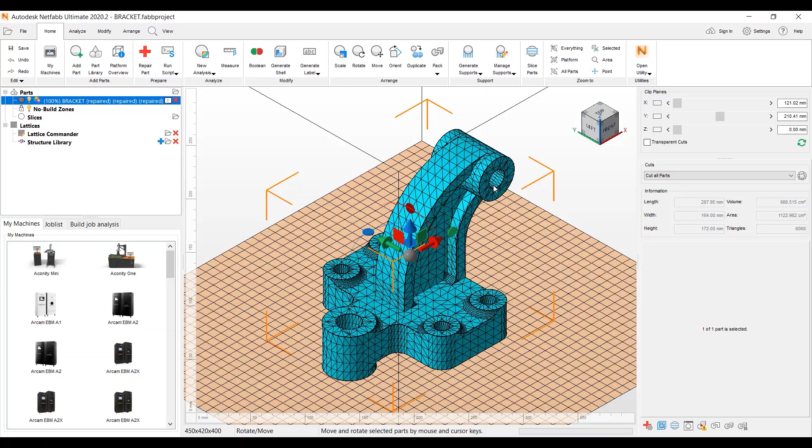And what I want to do is make some modifications to this triangulated mesh here. I want to go ahead and make these spot faces here where the holes are and extrude that up a little bit and fill in one of these holes on here to show that if we make some changes to this geometry, we're able to save this part as an IGES, a STEP file, or a SAT file to re-put into our CAD software to do more modifications there, or just have a record of what we changed in our additive software here.

So let's go ahead and go to our repair module here. And this is where I can mark faces or triangles on the part. I'm going to go ahead and use my surface marking tool here and mark these spot faces. And we're going to go ahead and extrude these. I'm going to mark those. We'll go up to the edit mesh tools up here, extrude surfaces.

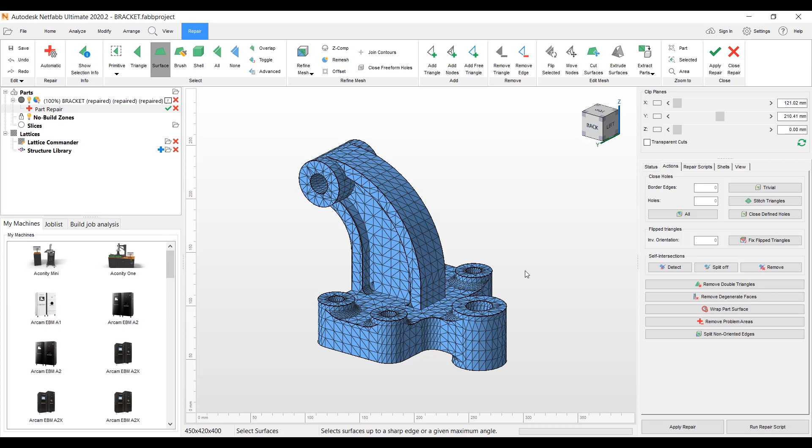And we'll keep the 5 millimeters here, showing you a preview here. We'll hit apply, and it's extruded those surfaces up to 5 millimeters. Now let's go to the cylinder here and mark these areas using our marking tool surface here. Mark the cylinder in there. We can go ahead and use remove triangles.

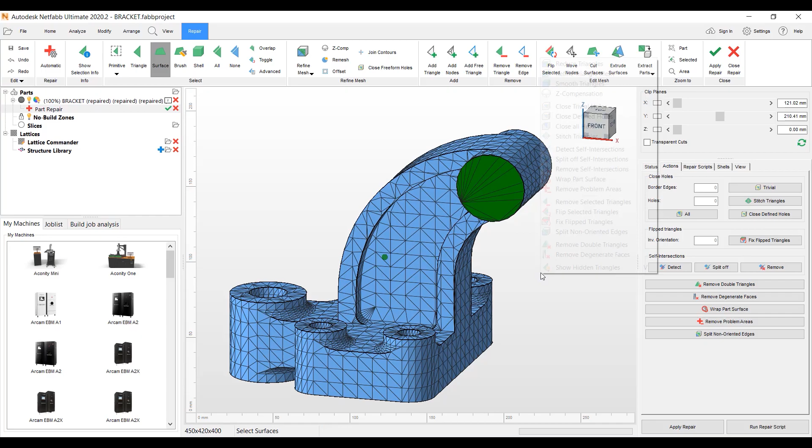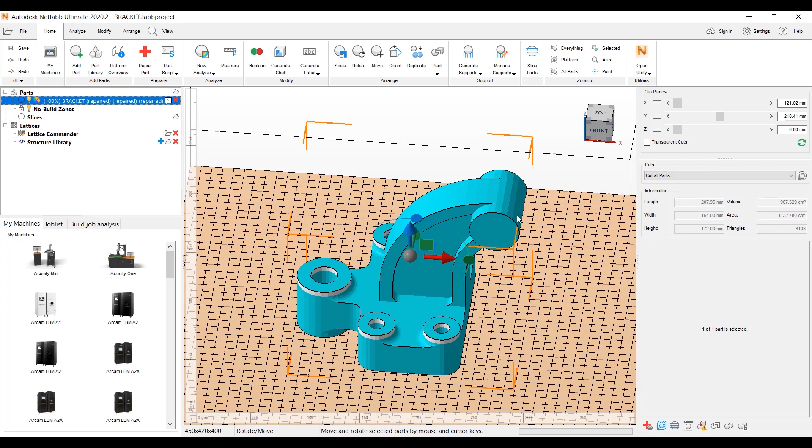Now we have a hole in the part that we want to fill in, and we can easily fill that in by going to our Actions tab here on the right, hitting the All Hole Fill option here, and then we filled in that cylinder on the top there. And now I want to be able to save this part in an IGES format. So we're going to pick Apply Repair here, save what we've changed, remove the old part. It just takes the old part out of the parts tree there.

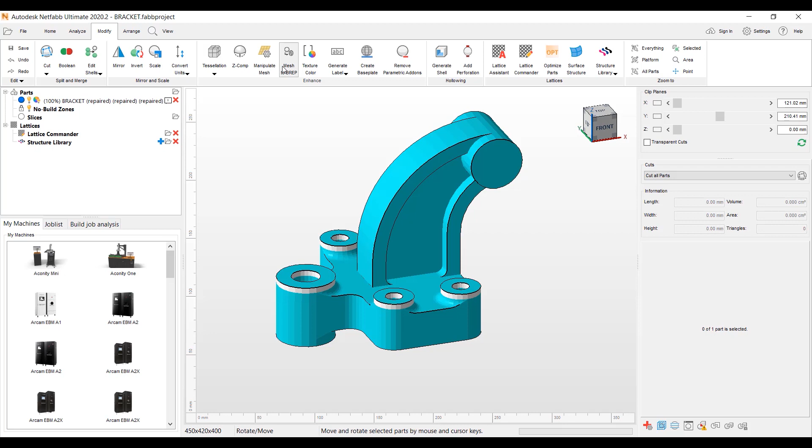And now I have my part here on the screen that we modified. I'm going to turn off the platform here for better viewing. So we have this part here. We've extruded the spot faces on here. I filled in the cylinder hole on the top. We want to save this to an IGES, and we go about that by going to our Modify tab up top. And we got Mesh to BREP.

And when you use the Mesh to BREP, you're going to get this dialog that tells you it needs to check to make sure that this part has integrity. It has no self-intersections and no flipped triangles. We're all good there. And now we have a dialog for the parameters that we have to make the BREP patches that will show on this part when we create that. I'm going to retriangulate it. I'm going to detect and preserve sharp edges. What this does is it'll make sure the sharp edges stay on the part when we create the BREP patches.

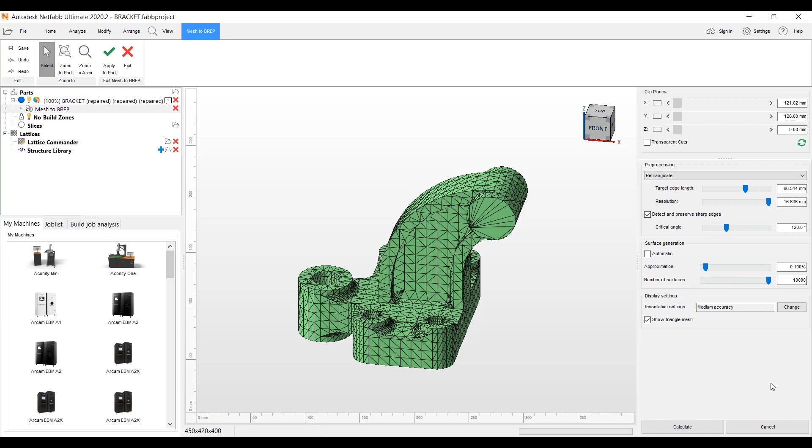We have the option because typically people are taking generatively designed parts or anatomically shaped geometries and using this turned off. And when you turn it off, it'll round the corners. We want to keep this part with the sharp corners, so we'll leave that on. We're going to put the number of surfaces that they can go up to. We'll put it all the way to 10,000. And then we'll hit calculate here. And at this point, it's going to put the BREP patches on the part that we'll see here in a couple minutes.

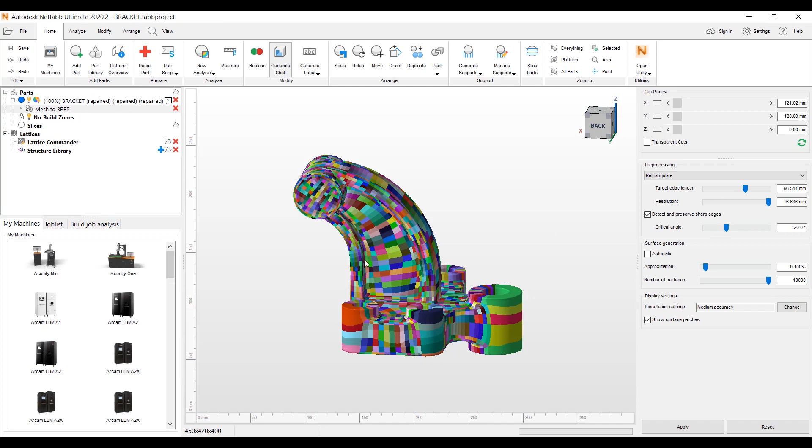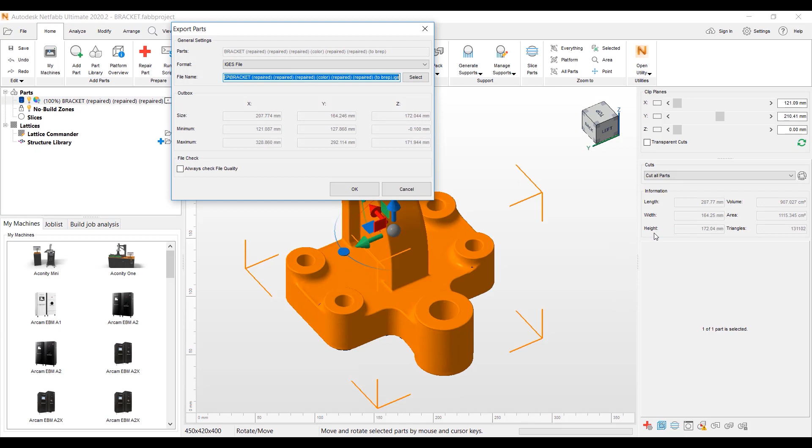And here we are. We have the BREP patches on the part. We're going to hit apply here to accept what we've changed, and I want to remove the old part out of my parts tree. Yes, I do. And now we have the part that is complete here that we can then export out as an IGES file or a SAT file or STEP file. We do have other formats that we can output to, but we're going to go IGES. And then you say, okay, save it in your directory.

And what will happen now is you'll have the ability to open up this IGES file in your CAD software to either make some more modifications or at least have a record of what you changed in Netfabb software. And that's a great tool to have to be able to go back into the CAD package from what we've changed.